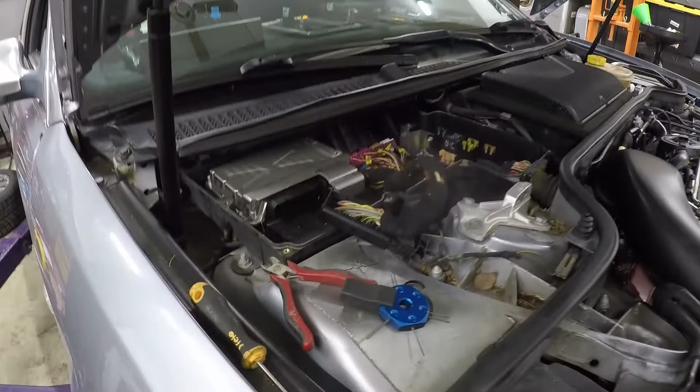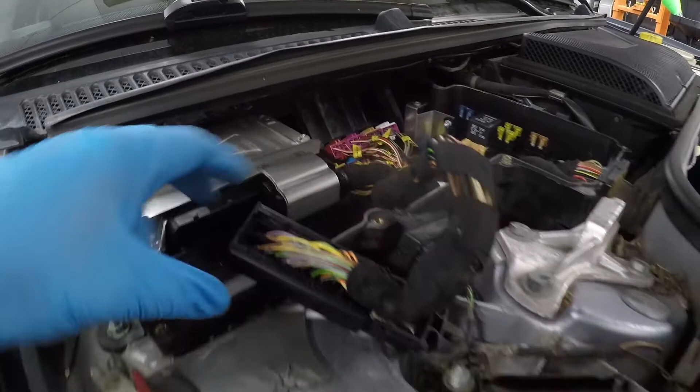Today we're going to work on some wiring. So we need to add a clutch pedal switch. So on the ECU connector, you can do this actually without even removing the ECU. This is the big connector. Pull this back and that'll make it slide off.

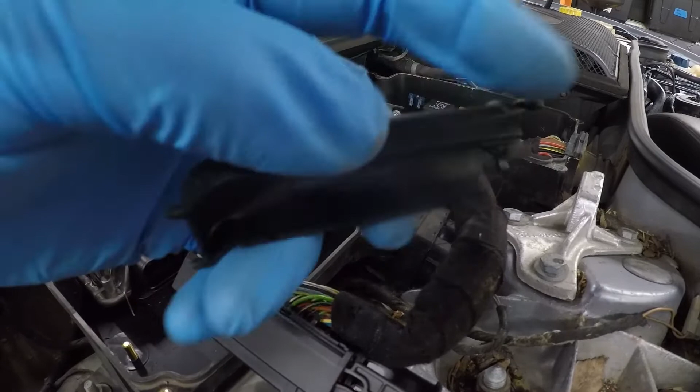So the back shell here is held on at the far end with just some hooks, and then there's a couple tabs, one on each side. So there's a zip tie, the strain relief releases it, and you just gotta slide a little screwdriver in here at the end on both sides, and that pops forward.

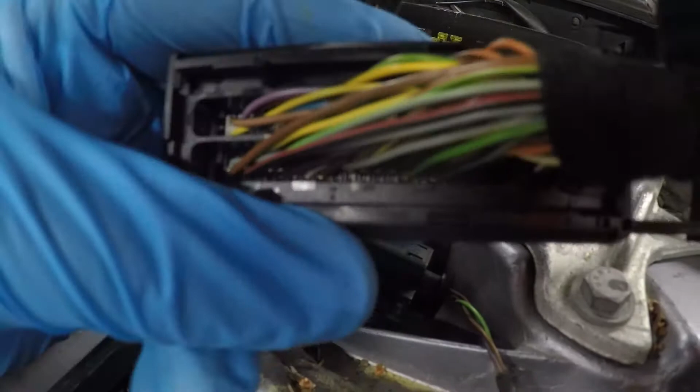So the clutch switch, we need pin 39. Not sure if you can see, but there's reference numbers at the top and bottom. So you just gotta count out to number 39. It should be an empty pin, but the connector is full of the pins, so you just need to remove the pin from that spot, and then you can crimp it onto the terminal or onto your new wire.

But there's a safety catch on here on the front side that locks all the terminals into place. So that little purple bar, you need a little pin tool, slide it in the center, and then use a little screwdriver to pry that out. Then that'll unlock all the pins, so then you can remove them. So pin 39, and then it's gonna route somewhere.

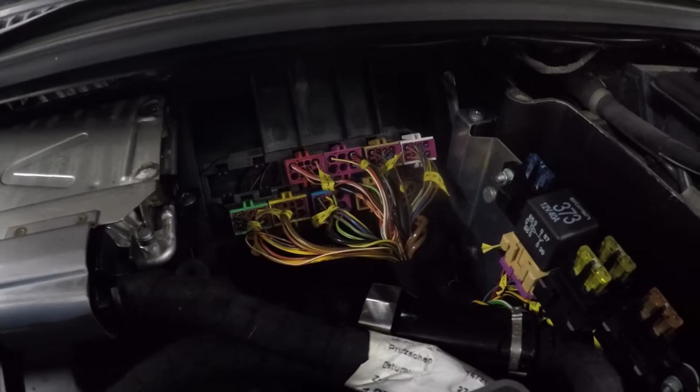I haven't quite decided that yet. Looks like there's a penetration at the back of the ECU TCU box that goes into the cabin, and then maybe route it on the back side. Otherwise, I guess you could route it out of here and through the heater box.

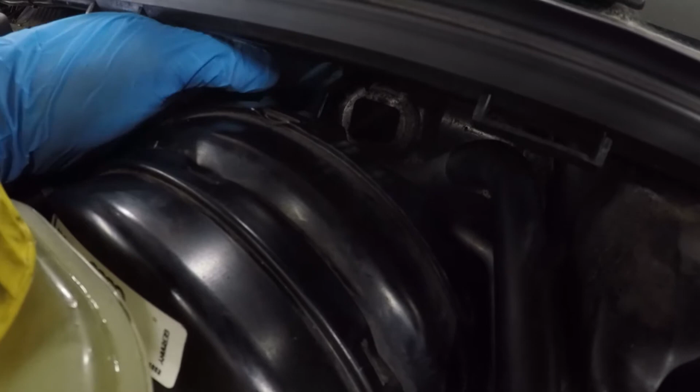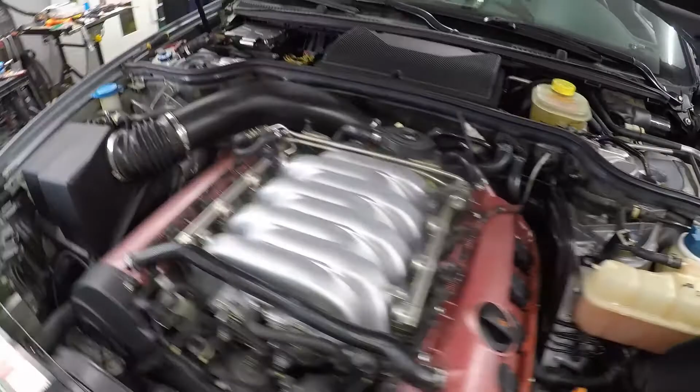And on the pedal cage here, there's a little rubber plug, which is for the 32 valve cars. That's where the cable throttle comes through. You could route it through there, just make sure it seals properly, and that'll be right there at the clutch pedal for you. So, haven't decided which route I'm gonna go yet, but once I do, I'll show it to you.

After you remove this purple lock strip, there's a double row of terminals, and looking at those reference numbers stamped on the outside of the connector, look for the one that has 39 in it. I forget what numbers these say, but it goes from like 25 to 40 on the inner row. So you can kind of pull lightly on the wires, and this whole terminal block will pop out.

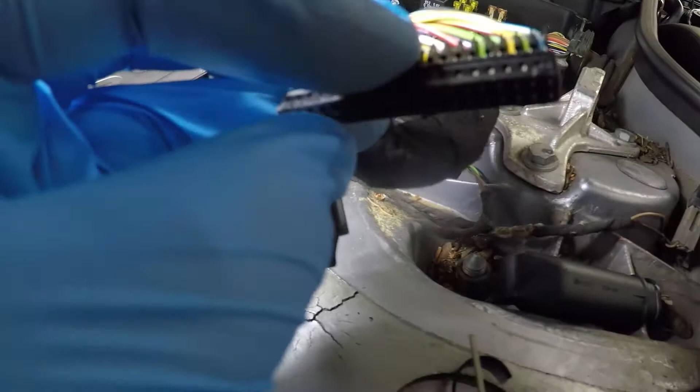And on there is the numbers. So on this side, it goes from 6 to 24. So it's actually going to be the back side that we want. It goes from 25 to 43. So, counting backwards, 43 to 40, 39. So 39 is going to be that blank pin in between a black and red and a white and black wire.

So there's a pin already in there, and those pins are held in at the forward part here, and you'll need to use a very small screwdriver or a pointer to kind of apply some sideways pressure, and then you can release the pin and remove it. And then you'll want to use a wire crimper to crimp that pin on properly.

Okay, pin's out, and you can see 39, which is now the one with no pin. Here, I got it here. Hopefully that focuses. And these use a pretty low gauge wire, probably like 20 or something. And it actually looks like you don't strip the wire at all. It's kind of like those really crappy vampire splices, so you don't strip it, and it has two different bite points, but then you do crimp the strain relief at the very end of the pin.

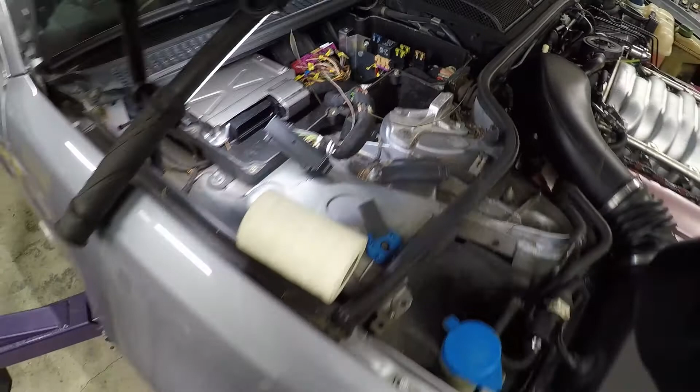Got my pin crimped and installed. The thinnest spool of wire I had was like an 18 gauge, which was way too thick, so I found some wire off of an old harness from a car I parted. It's always good to keep wiring harnesses around for connectors, for wires, just like this. So I've got, I don't know, 4 or 5 feet. Hopefully should be long enough.

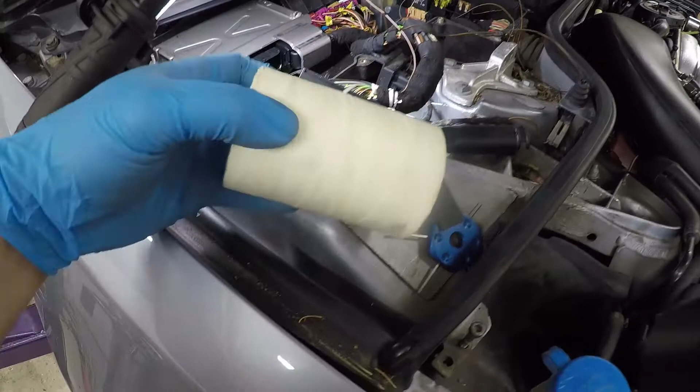So I got that on the pin, put it back into 39, and used some lock stitch to tie that to the main bundle here. This is a trick I've learned working in the aerospace industry, sometimes called lacing tape. It's a coated fabric string that's grippy, so it grips on itself when you tie it. I think it's flame resistant, maybe made of Nomex or something. It doesn't chafe on the wires, doesn't provide any hard plastic for bundles to chafe on. This is how they build aircraft harnesses.

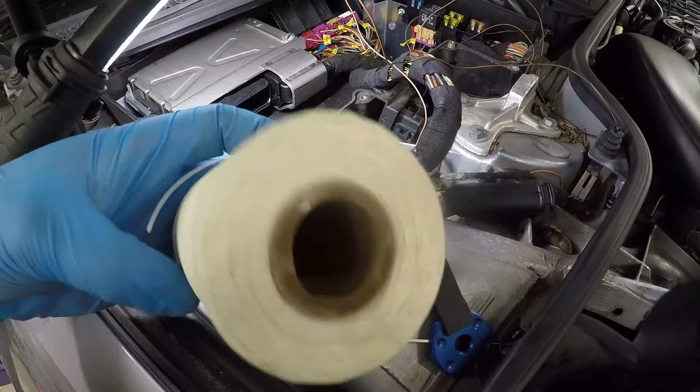In fact, it was only a couple years ago that they finally approved the use of zip ties on aircraft in certain situations. So I like this lacing tape. You just buy a bundle, it's not too expensive, and it lasts literally forever. It makes things nice and clean. There's no sharp edges like you get from people who don't know how to cut zip ties, which can cut your hands, and you don't have the bulk of that connector. So it's just a nice way to clean up wiring harnesses.

So I will bundle this back a little further and then start investigating how I want to route this into the cabin.

Way down there, let's see if the light—you can see it maybe passes through a grommet or something. I don't know if that's going to require removing the glove box to get to that area. I guess we'll see.

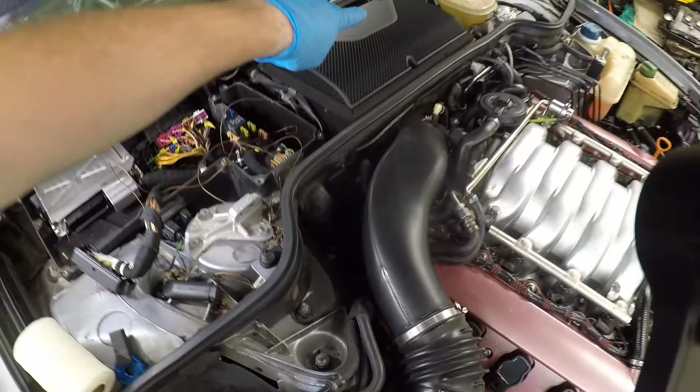Hopefully I can just reach up through the floor well, behind the insulation, and then route it from here over to the driver's side. So, stand by. Oh, and one other note.

So when you crimp that on, and even whenever you crimp anything, always do a continuity check. Take the other end, strip a little bit off, and do a continuity check between the bare end and the pin end. Wiggle them, make sure there's no loss in continuity.

I had an issue with the reverse light harness on the trans that I built—the little injector connector for the reverse light. I didn't get the pin crimped enough, so thankfully I tested it and realized, hey, I don't actually have continuity here. So I had to take apart the connector and re-crimp it.

So always double check. Wire is down through that hole. It's kind of a pain with the really thin gauge wire. Let me see, do I still have it?

What I did was take a little piece of thicker wire, bent the end around, and then taped the wire to this with some Scotch tape, so there's no sharp edge to catch on anything. The wire had been longer. I pushed it down, but you don't want to pull it back up because there's that hook on there—you don't want to grab anything. So I pushed it through, then cut the top, pulled it all the way through, and then pulled the wire.

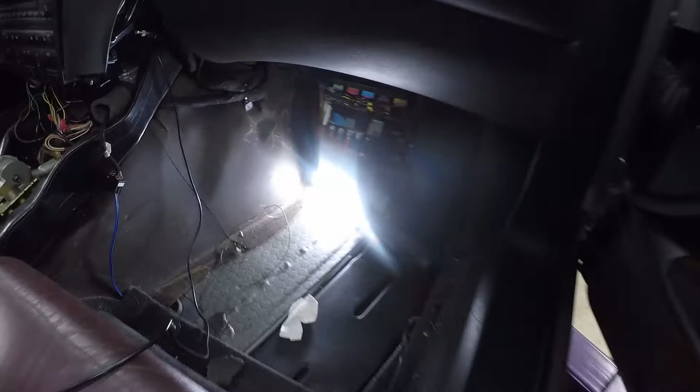Good news is you don't have to remove the glove box. It just kind of comes in. It's kind of a pain, but it comes up behind this insulation, and there's a wooden kick panel there that you got to remove.

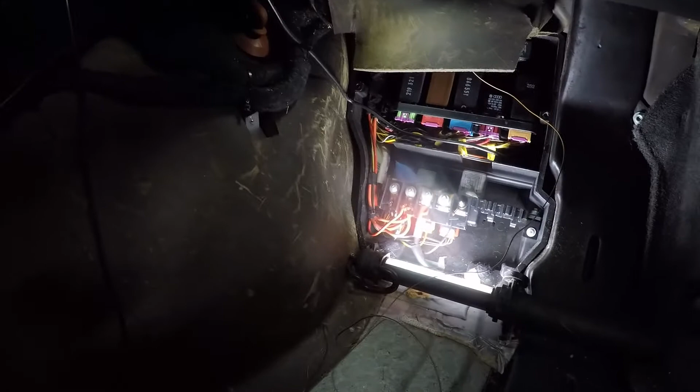So now I will try and route this up over there, over the trans tunnel, and over to the clutch pedal. And then I'll show you what we need to do. This is just one of the two wires—the other wire you need to route to the brake pedal switch. I'll show you which one to do there.

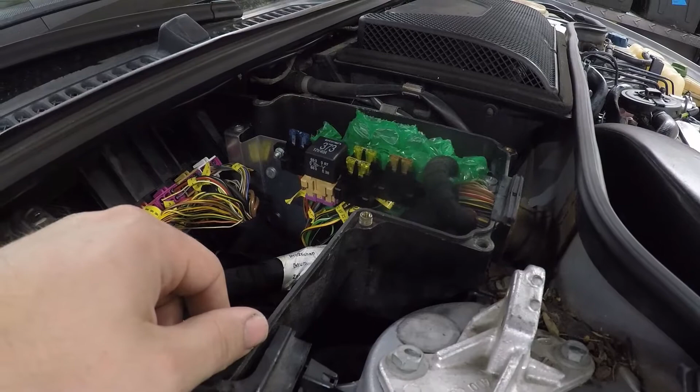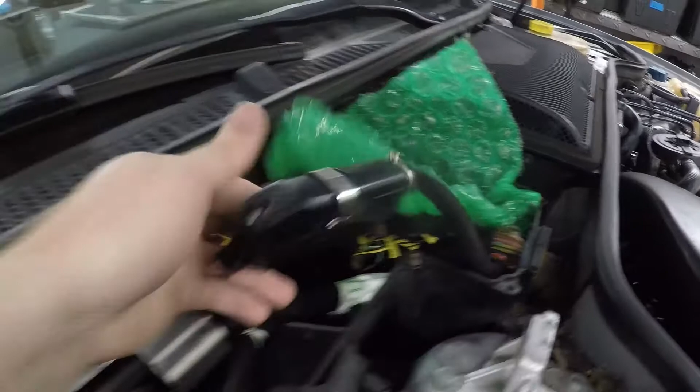All right, another tip—since I am an acoustical engineer, NVH (noise, vibration, harshness) is something very near and dear to my heart, and this Audi tried very hard to make this car very quiet, so I want to keep that. One of the things is, you've got this big TCU connector, and if you just lay it in here, it's bound to rattle around and make noise. So over here where the TCU harness is, just throw in some bubble wrap, shove that down in there.

Now it's not gonna make any noise. I was trying to find some foam tape or something, but I didn't have any. Bubble wrap. That'll do just fine. Working on clutch wiring.

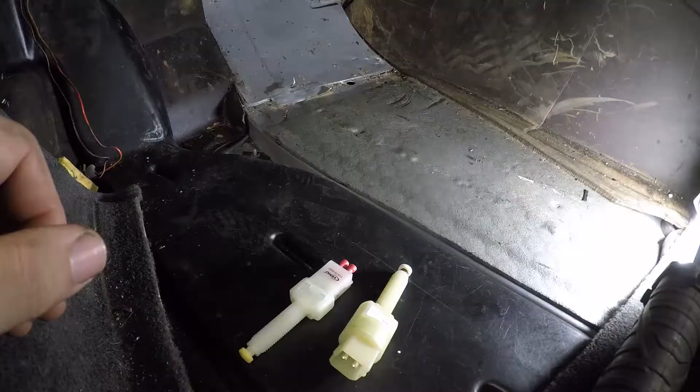So got my wire routed over. I routed it underneath the radio, the HVAC.

Ignore my really bad wiring. Well, not my wiring. Wiring of a previous owner for retrofitting the navigation and this add-on Bluetooth kit. Eventually I'm gonna redo that and try and find a Bluetooth, maybe a factory module that integrates

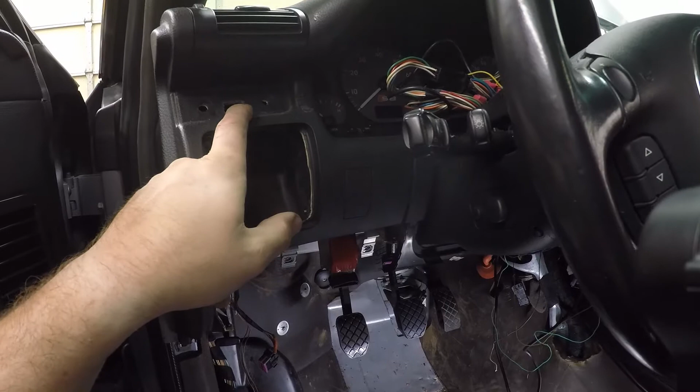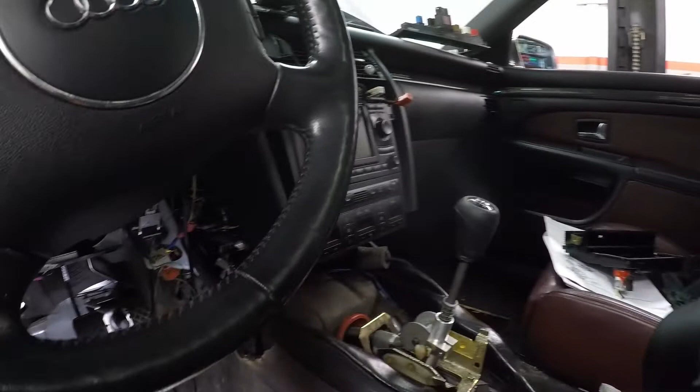with the nav unit, versus before they kind of had one mounted to the trim here. I mean, it was nice, it worked. It's nice to have, it was only Bluetooth phone, but it plugged into the speaker in the center console, and it would pause the music, and it integrates really well, but there's just like 4 different modules to have to do with that. But anyways, let's get back to clutch switch.

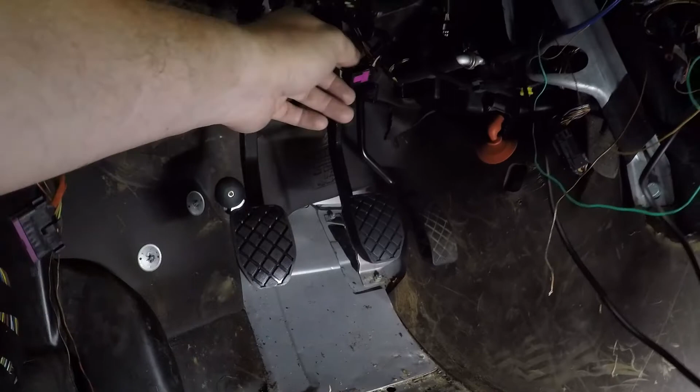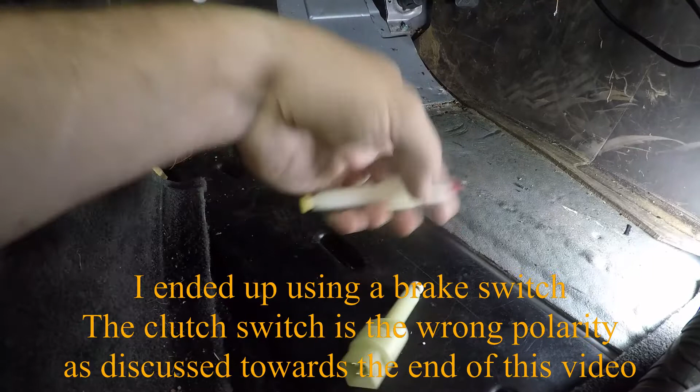So you got your brake switch connector there. This is your brake switch, clutch switch. So you have a couple options. You can use a brake switch. There's 2 circuits on the brake switch. Just choose one of them. I got, I think this is a brake switch from a B5.

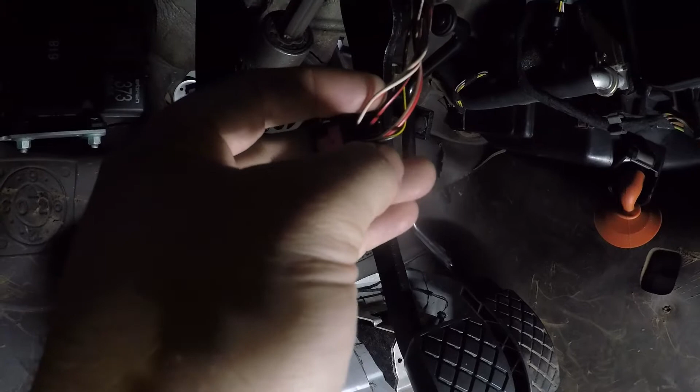I forgot something. So, clutch switch, 2 contacts, and you ran one from the ECU. Where's the other one go? So you need to tap that off of the brake switch circuit, and you want the black and yellow. So I think that's hot. I thought it might be a switched ground, but I think when I checked the Bentley, it's actually a hot wire, so you're triggering the ECU with positive instead of ground.

But I think on other cars, basically it's pretty similar on like B5s. You just want, of the smaller pins, you want the darker wire, which on this one it's black and yellow. I think on other ones it might be black and blue, but I double checked that in the Bentley, and that's what you want. All right, time to do coding.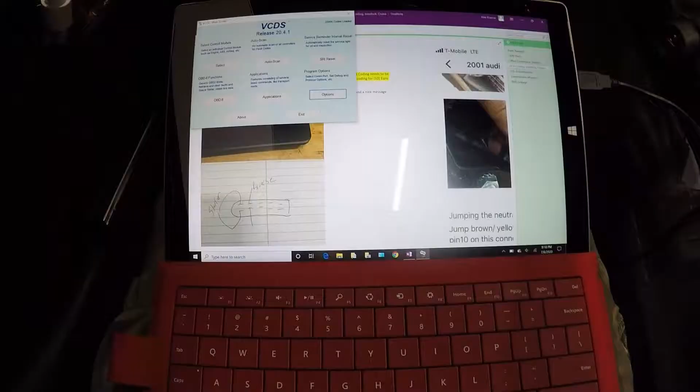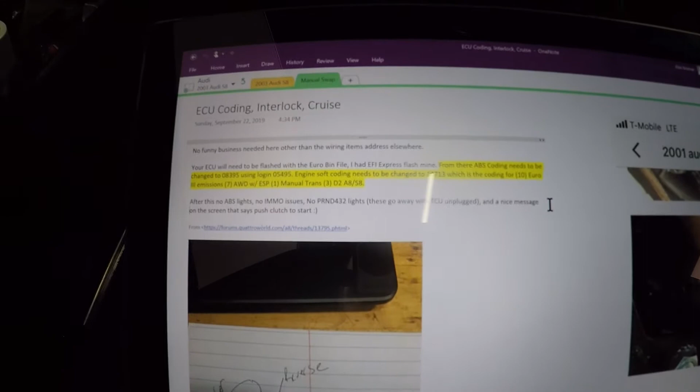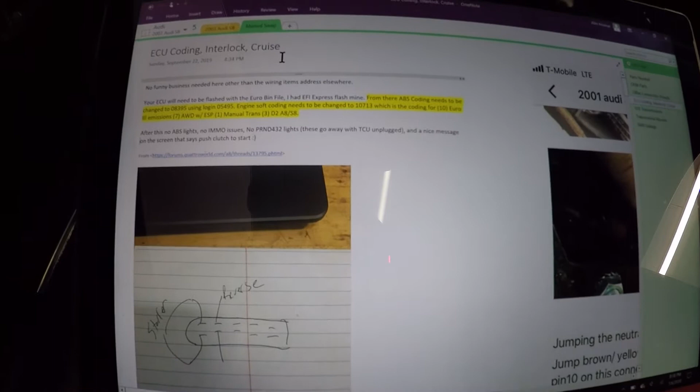So got Ross-Tech VCDS up and got my notes. So this is OneNote, and if you've never heard of it, you should. It's a Microsoft Office product, so if you have Word, Excel, etc., you probably already have it. It's free to download if you own that, and it's a way to just kind of organize notebooks.

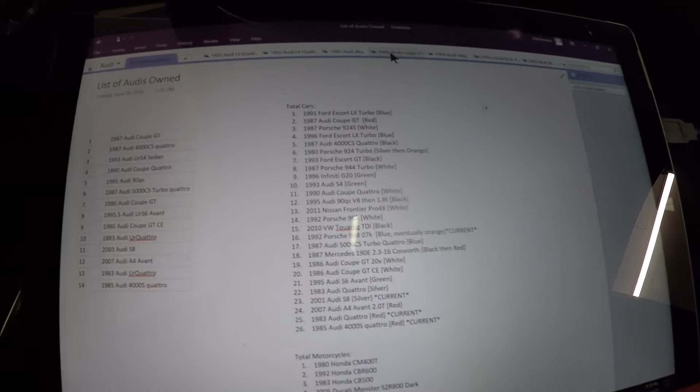So here I have my 2003 S8, but if I go up, I've got kind of notebooks for every car, and in each of those I just have all kinds of notes about anything you want. So this is how I document all of my swaps. So like, here's a bunch of parts diagrams I had shown to figure out all the OEM parts, some other conversion threads where I saved out a bunch of pictures.

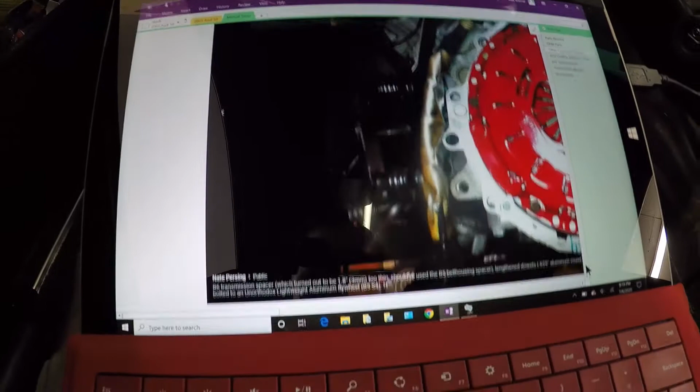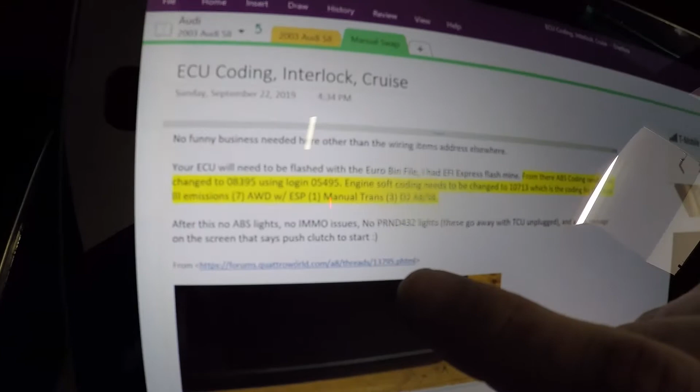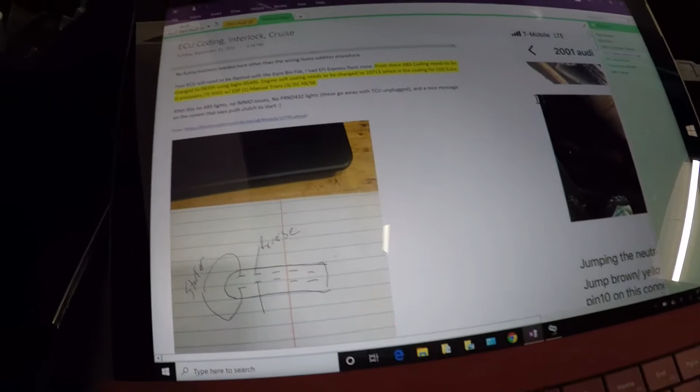One of the cool things is if you ever copy and paste something, it will paste it, and then it'll also show you a link at the bottom that says where it's from. So you can always kind of go back to that web page. So something I pulled off Quattro World, and it says we need to code the ABS to 08395 using login 05495.

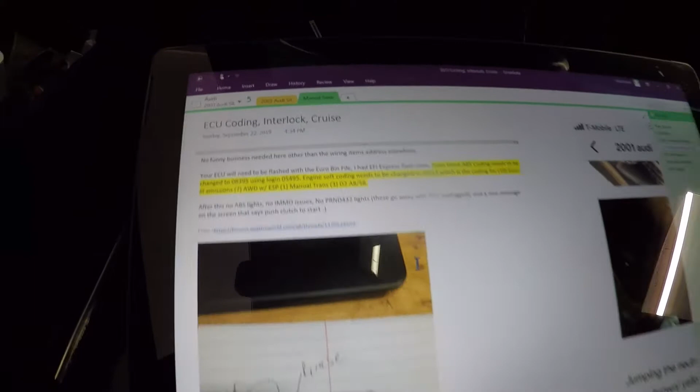So let's go to VCDS, select the control module. We're going to go to ABS.

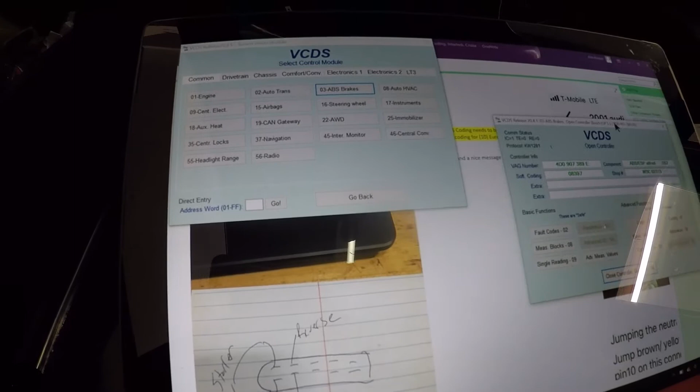Is that connected? I'm going to close out of here so I can rearrange this, just so I can see my notes.

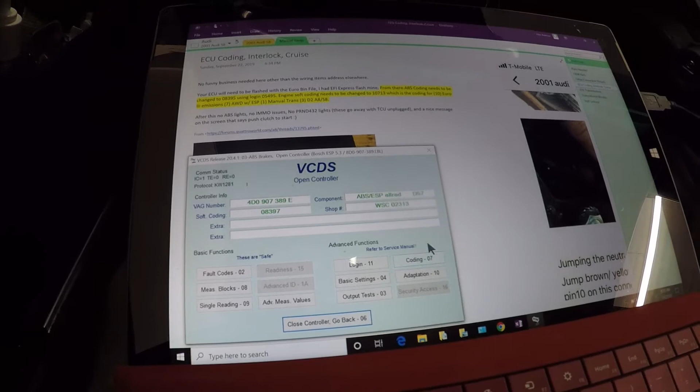Alright, bringing up the ABS module. And this is when you turn the key on, it's giving all different kinds of errors there. So there's lots of beeping. So I think we go to coding.

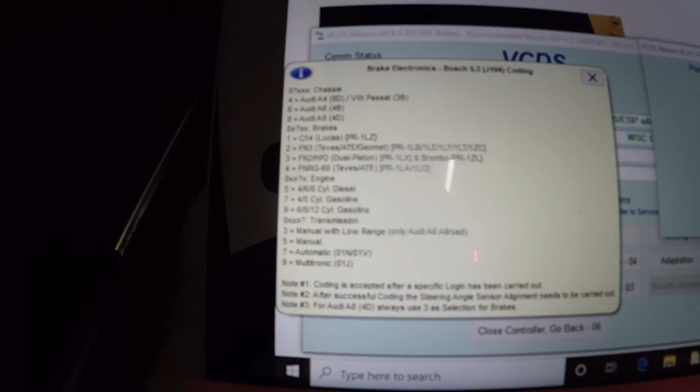So there's the keys. So it's currently 08397, which is Audi A8, dual piston Brembos, 8-cylinder, and then the last one is automatic is 7, and we want to switch that to 5.

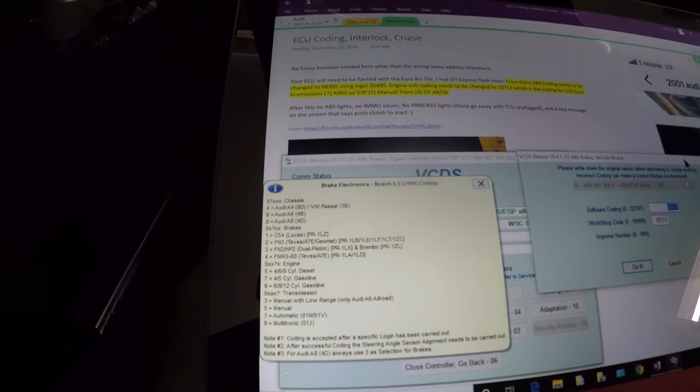Sorry, phone's blowing up. Howdy guys, wanted to chat.

Yeah, so I'm going to change from 08397 to 08395 to let the ABS know that's the manual transmission. So, seems like it took it. Let's go to coding again.

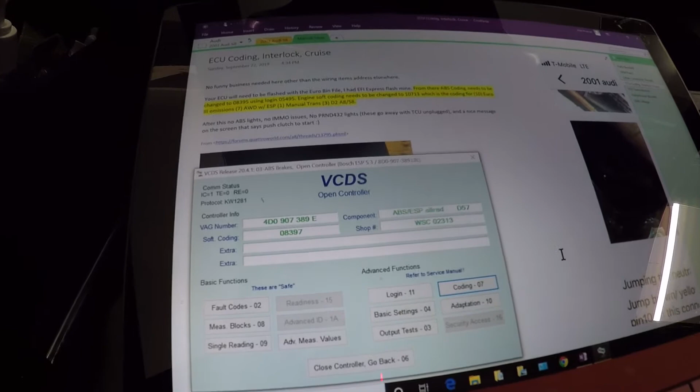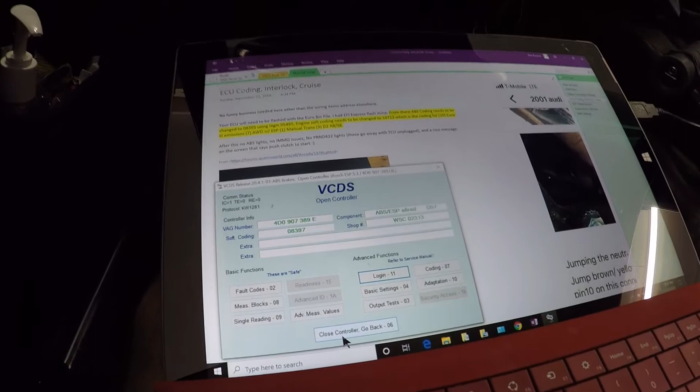No, it didn't. So we might have to put a login, and so login using 05495. 05495. Okay, now we can go to coding.

We might have to do that. Do the login workshop code underneath. Oh no, there, now it took it.

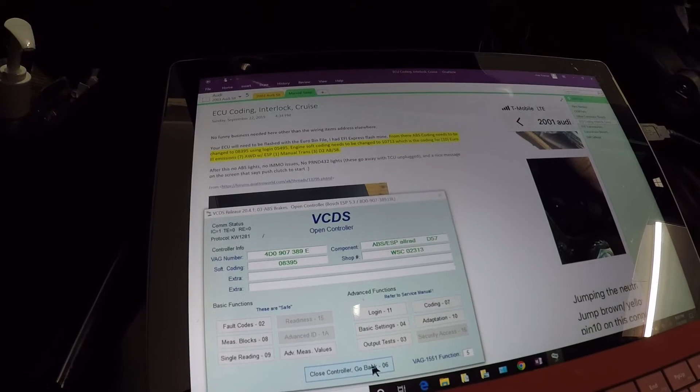So 08395, okay, the ABS is set. So now we need to change the engine soft coding to 10713, which is going to be Euro 3 emissions, because we changed the tune to the Euro tune. It's going to be all-wheel drive with traction control, manual trans, and D2A S8.

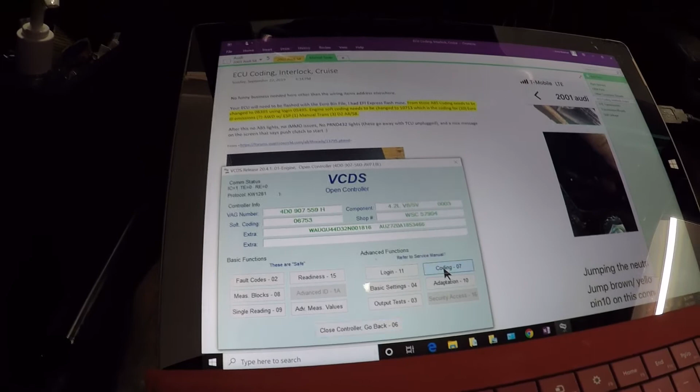Now I believe if you wanted to turn off traction control, you can via the engine coding here. So we are currently at 06, which must be US emissions, 7 for all-wheel drive, 5 must be automatic, and 3 is D2A S8, and we want to change this to 10713.

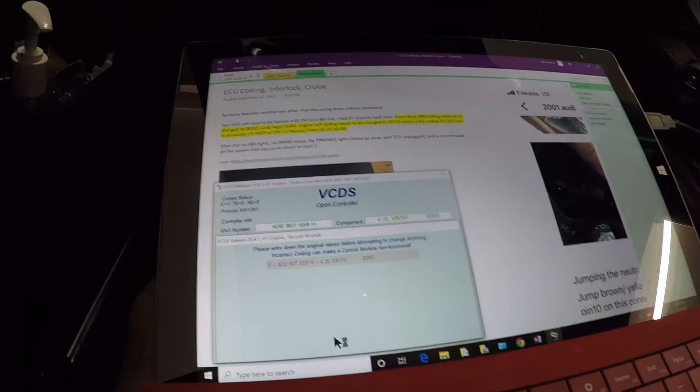Do it. And go back to coding and double check 10713. Okay, that's good. We're going to close the controller. So that should be those. Let's double check.

Key off, key on. I got lots of warning things. Wonder if since the trunk's open, it's not gonna tell me to clutch in. Let me go check that. All right, let's try that again.

Still not getting clutch message. I thought somebody said it would do that, but I guess we don't have the park display anymore, so let's give it a start.

Ignore my airbag light, I know it's an issue, it's a seat occupancy switch. But so we don't have ABS lights or ESP.

And so I also fixed my rubbing, so let's check that. All right, wheels are now turning and no rubbing. Perfect.

All right, so now I just got to button things up. Put this interior back together. I got my carbon trim, so I'm going to install that.

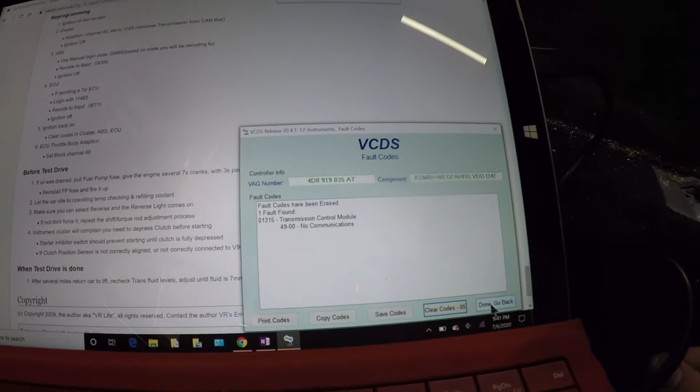Alright, still at it with VCDS. I just was going through things to make sure, my notes said, just to change the engine module and the ABS module. But I wasn't getting that clutch in setting, so I was like, do I need to do anything with the cluster? So this is S4 wiki, for B5 swaps.

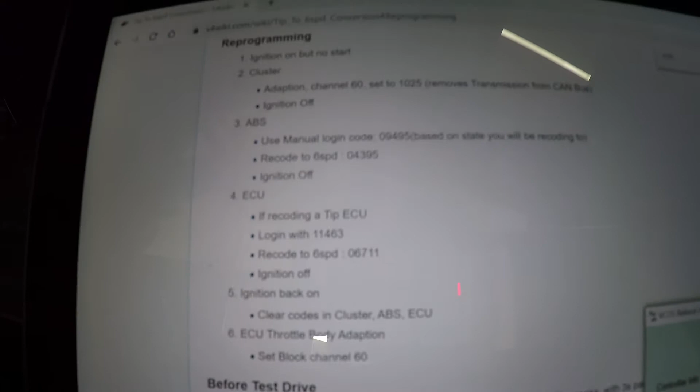They mention changing the cluster to tell it to not look for the transmission module. So if you run the fault codes on the cluster currently, so I just cleared them, this one reoccurred. So it's saying it can't find the TCU.

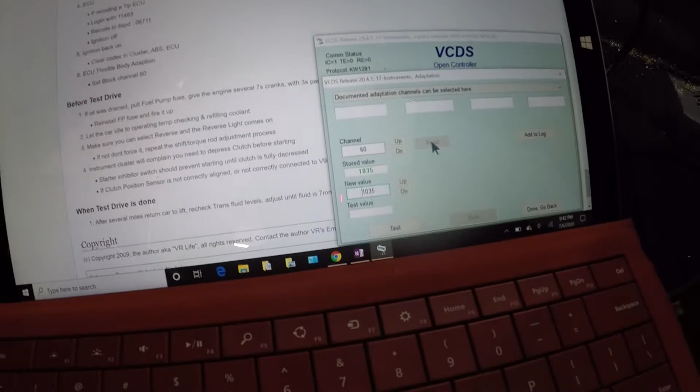So S4 wiki says to set channel 60 to 1025. So I go to 60, you read it, it's at 1035. Change it to 1025. Test. And then it's save. Okay.

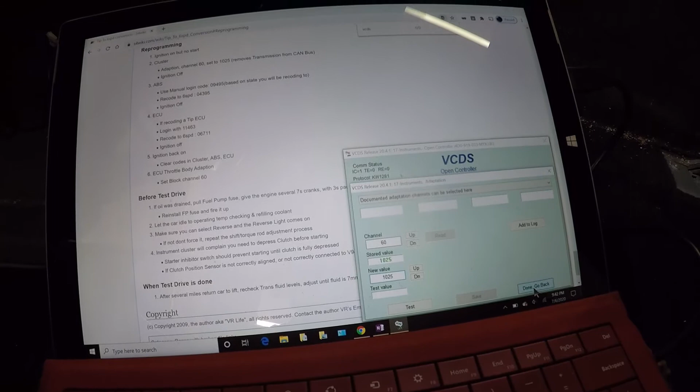Let's read it again. 1025, okay, so that took it. So I'm going to key off, key back on. So I still get those ABS beeps at the start.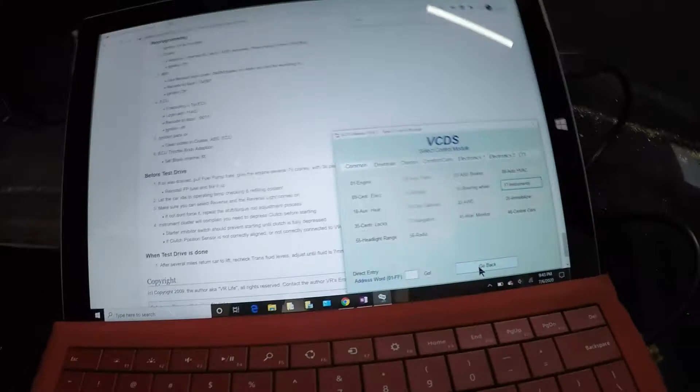In the notes of VCDS, it says you need to recalibrate the steering sensor after that. So I think that'll kind of go away after I go drive it for a bit and get it recognizing all the wheel speed sensors again.

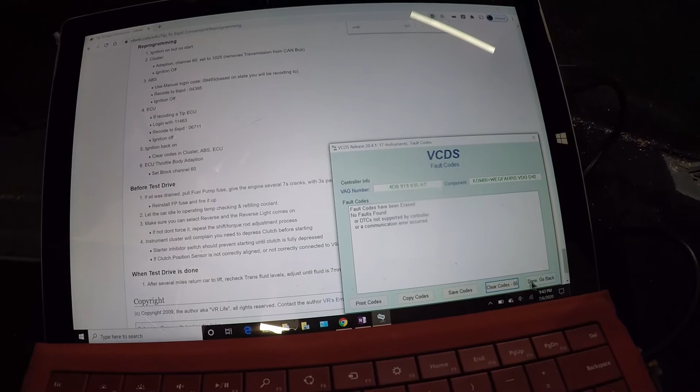So let's check the cluster, let's look for fault codes, clear them. Let's go back, read them again. Okay, I have these fault codes for telematics, which is normal. I think that's the old OnStar system, or it's the fact that I removed navigation, but okay.

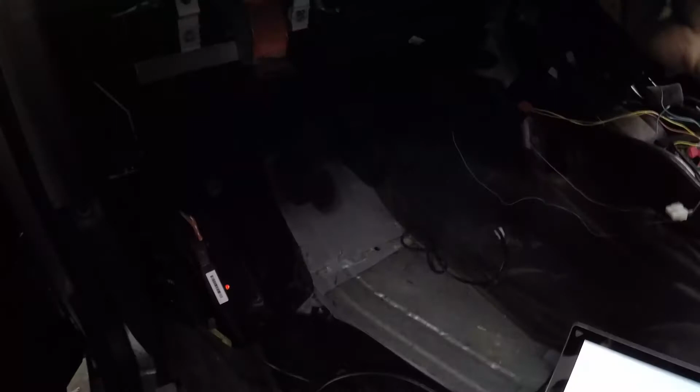That's to be expected. So still don't get a clutch warning. I wonder if it'll let me start without it. Yeah, so it still will. But...

I know my switch is working, so you can verify that. Oh sorry, turn the car off. If you go to the engine module, ignore the door chime for a second, so I'm sitting outside the door.

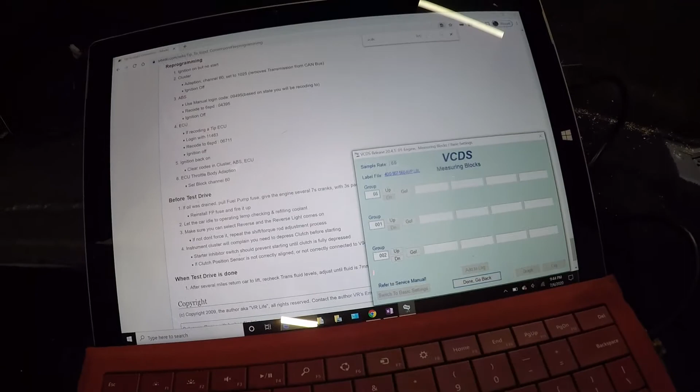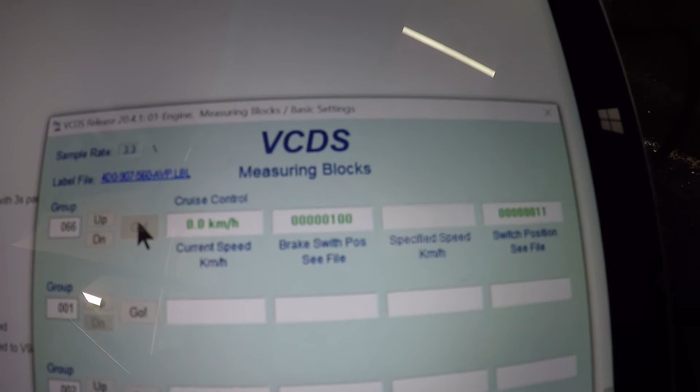And we go to measuring blocks. If we go to channel 66, so this brake switch position. So that's really brake and clutch. Sorry, please ignore the chime.

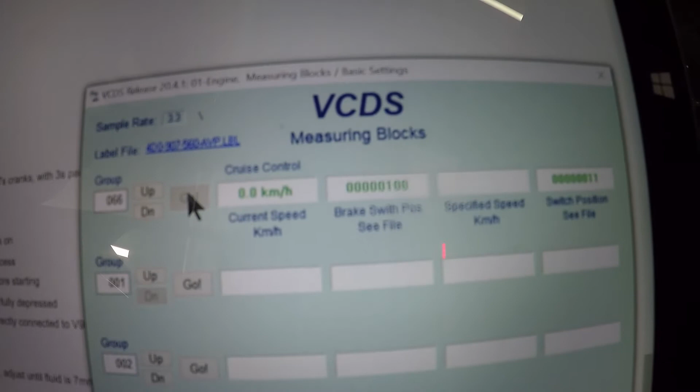So that third to last digit, that 1, is actually the clutch switch. So if I press it down, it goes to 0 and back up. And the last 2 zeros are the clutch, or the brake.

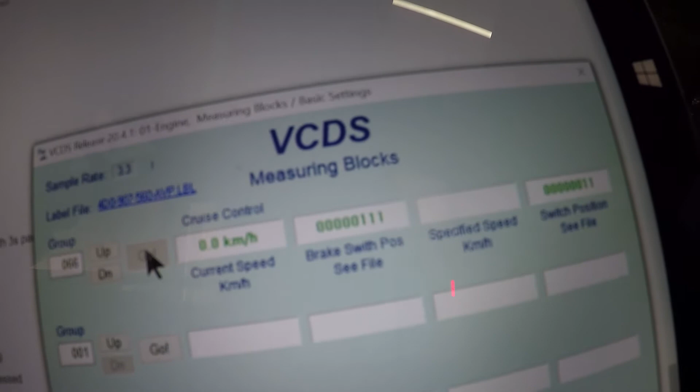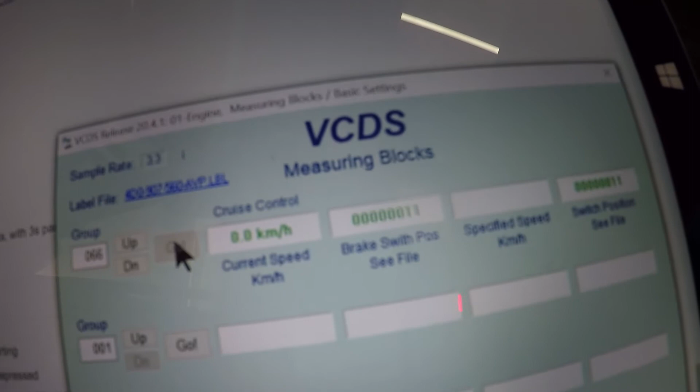That's the initial test switch, and that's the full-on brake light switch. So you can see if I do clutch in, it goes to all zeros, brake test, and then brake light, and then clutch out. So that all works. So the engine module is at least seeing the clutch.

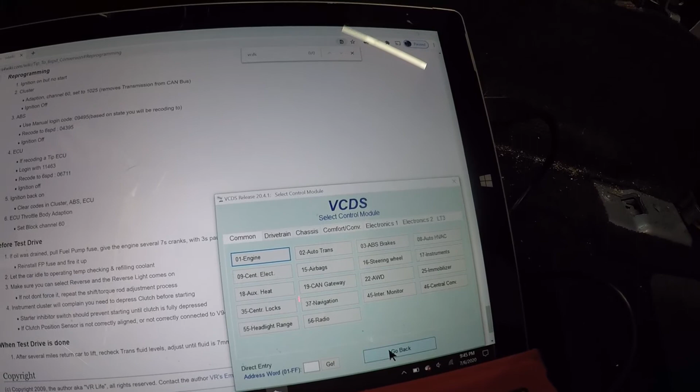I don't know if it's supposed to not start with the clutch. Maybe that's the starter interlock that we jumpered from the Auto Trans. But anyways, figured I'd show that.

I don't know if I've got too many warning lights. I got the brake pads unplugged and low coolant and door open. I don't know if I'll actually get that depressed clutch to start. We'll find out, if not, oh well.

Hey guys, it's been a few days. I know I promised a driving video, but the car hasn't been driving that great. But I finally figured it out.

So I was having issues where right at tip-in, as you're pressing the accelerator, it would kind of stumble. And I think I talked about it where it would start to judder, and then that would cause your foot to judder, and then the whole car would just buck and act really weird, and you have to get off of it and shift into the next gear.

Then I had intermittent rev hanging, so sometimes the revs when you clutch in wouldn't fall, sometimes they'd go up, sometimes they'd fall like a rock, and it just wasn't very consistent. So I wasn't sure what was going on, but I wanted to check to make sure, okay, well, maybe my clutch switch wasn't working. But I'd done it, and I have the video to say, oh, hey, look, that value's changing as it's opening and closing. What I didn't notice was it was the wrong value.